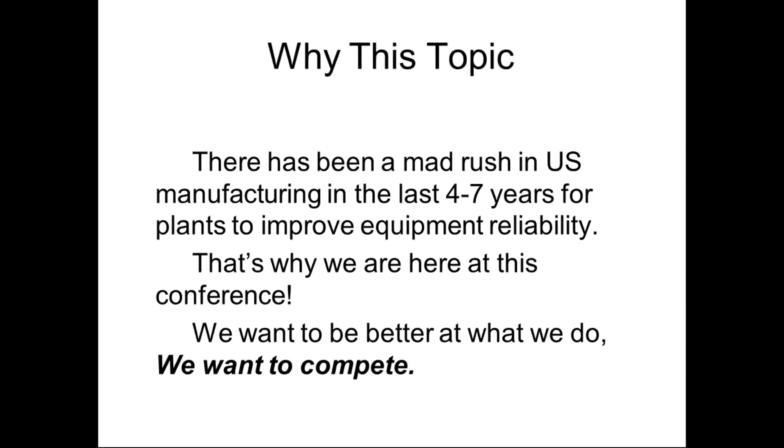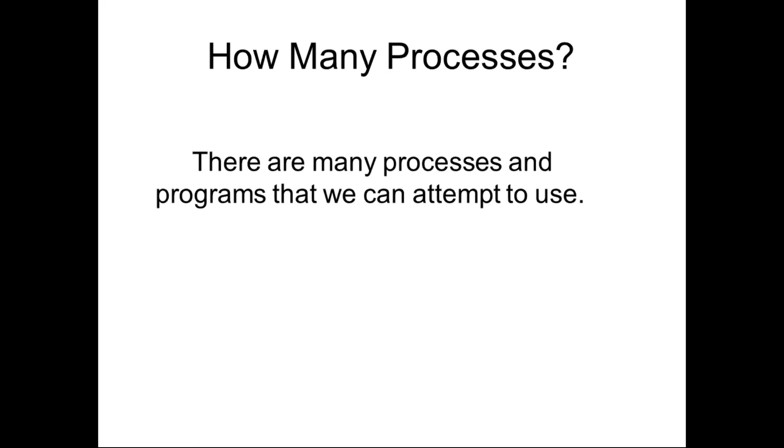What we're really looking for are processes we can implement in our facilities that actually show results in the end, either in more output rate or in lower cost.

This is a question I'm asked by corporate people all the time: is there one process that can take us to these higher levels of equipment life and equipment reliability? Is there a silver bullet out there? Well, there's really not, because every industry is different. Every one of these processes takes you to different levels and does different things for you. So there's no silver bullet that takes us to the end.

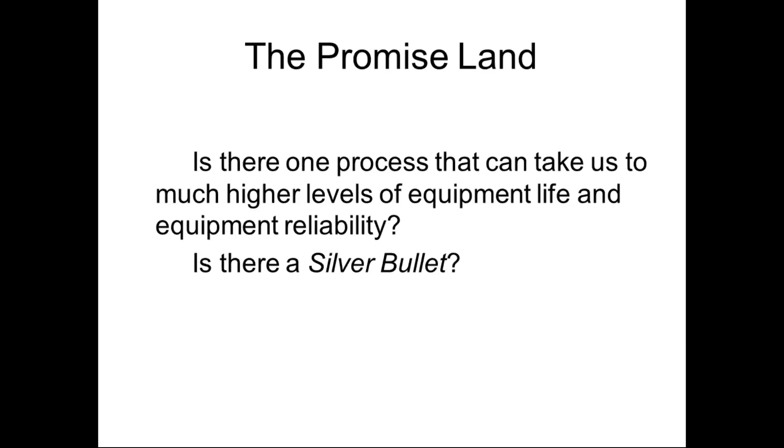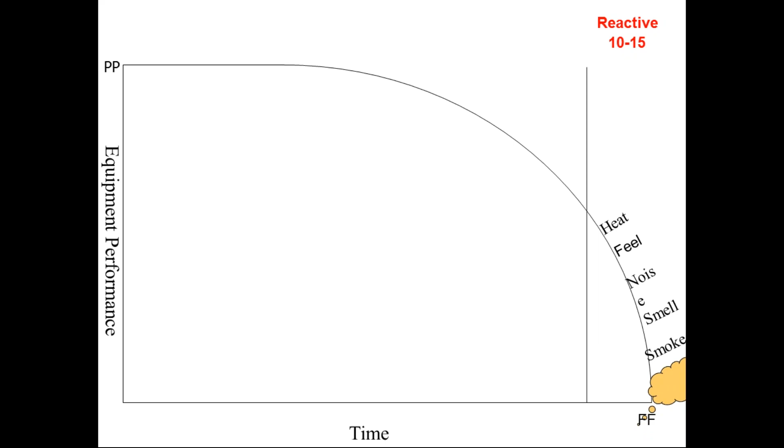If we start using predictive technology where we can predict failures up here, when they first occur in the equipment, before human senses can tell—examples of those are mechanical ultrasound, vibration analysis, oil analysis, wear particle testing, thermography, motor circuit evaluation, and non-destructive testing.

If we use these technologies effectively and actually react to the data, we can make our equipment last a lot longer and have fewer failures.

Now, I've got these listed in an order, but they're not in any order of importance. For example, if I'm looking for particles in my oil, mechanical ultrasound's not going to help me there, but oil analysis will.

If I want to know if my coupling's out of alignment, I might use vibration analysis, and later down the line when components start wearing, maybe oil analysis kicks in. But we have to use the right technology for the failure mode you're looking for.

What this is saying is, if we use predictive technologies effectively, react to the data, and plan the work and make corrections up here in this part of the curve, it keeps the component from getting to this wear mode in the lower part of the curve.

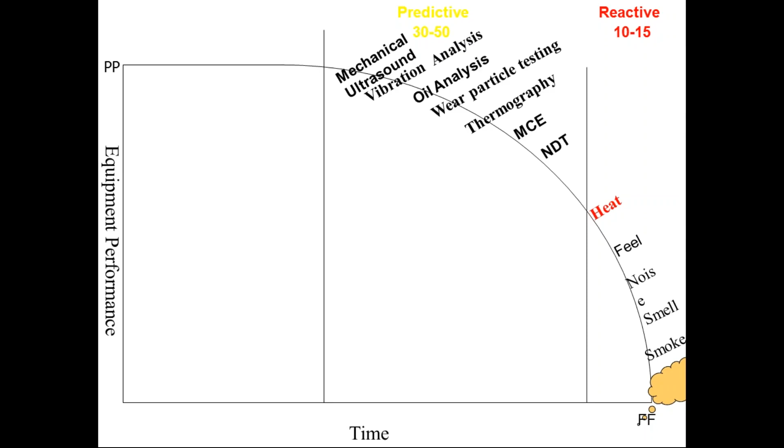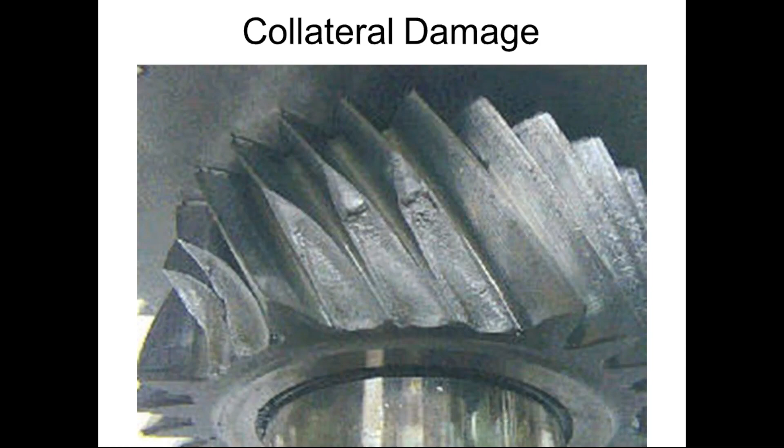An example of that is in a study we did on electric motors. Toshiba makes a better motor because they have higher balance standards. They mill the feet off to within a thousandth, so they use better insulation. More expensive motor for sure, but the company I came from, we used these on our top 20% of our critical equipment to eliminate failures on those high dollar cost items.

But you can see as you go down the line here, there's a lot of processes, and if we do these processes correctly, we become more proactive in our approach to maintenance and reliability, and our cost will eventually go down, and you'll have less reactive maintenance. I always tell everybody, you don't have to be 100% effective or proficient in these tasks, but you have to understand them and use parts and pieces of every one of them.

I've got PM tasks across here. We're performing PM tasks no matter what area of the curve we're in, but these PM tasks are going to get better, and they're going to change as we get better in our proactive maintenance area or better in our reliability process. Again, moving resources where we do more vibration analysis, more predictive and more proactive, moves us from that reactive area.

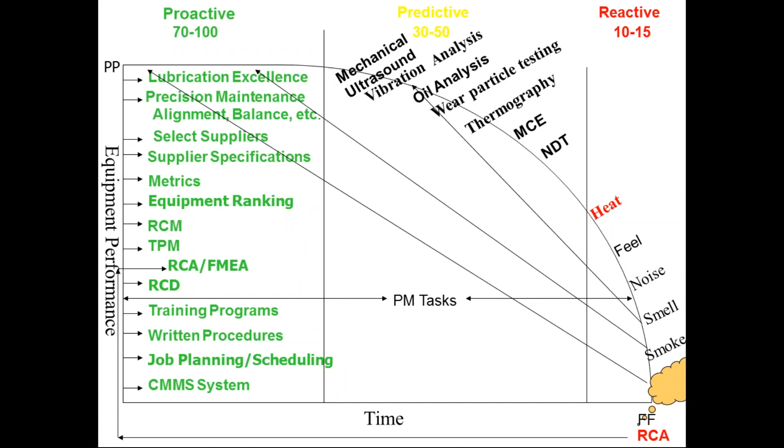As I travel from plant to plant doing training courses around the country, around the world, more and more companies are adopting these predictive and proactive practices and techniques. Why are they adopting these? Well, we talked about this earlier, to be more competitive in their respective businesses. If we do these things correctly, our costs go down, our production many times goes up, and we're more competitive.

Let's talk about some efforts people make in a couple of these areas here. We'll cover a few of them today: foundation and grouting practices, a very common construction practice during installation. If done correctly, it adds some reliability to our processes and our equipment.

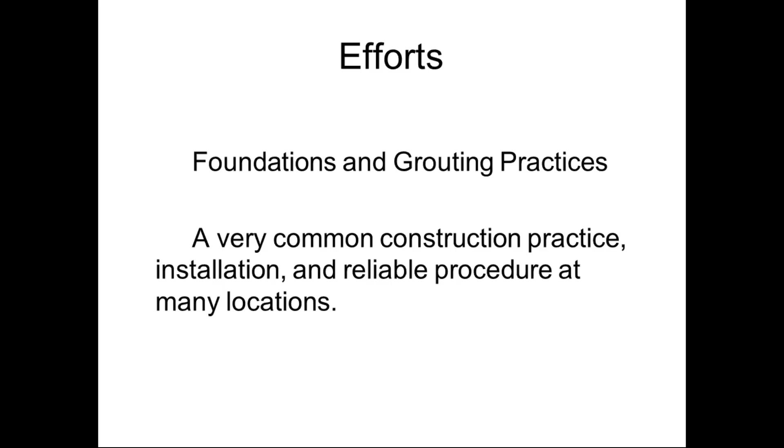Here's a structure that a company's putting in to mount some equipment on. We're doing the grouting process ahead of time, making sure the frame's level, supporting the frame 100% to the floor. And when we put our equipment on here, it should have less vibration, a lot more level surface to mount the equipment to, and it should gain us some reliability benefits.

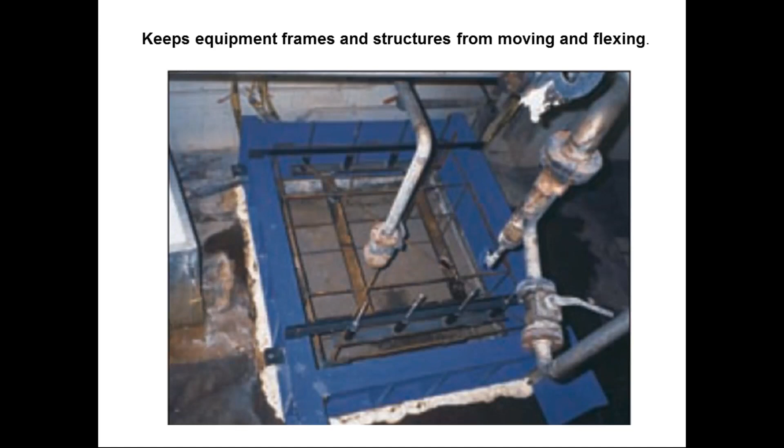Here's a nice application of a plant where the pump foundations are poured on a concrete base. Everything's grouted in place, and these pumps are a lot more efficient and will last a lot longer due to this reliability technique. But there's something we need to look at: after you pour the foundation, you have to use these grouting techniques, making sure we use a good base to mount the pump on.

If you look at the base in the upper left-hand corner, the standard base you see in many industries, it's a rounded piece of channel. The surfaces aren't completely flat, so we have to do a lot more shimming, a lot more chance to be out of alignment. The other two bases show bases that have machined surfaces to mount the motor on, machined surfaces for the component, whatever it might be, and we can do a lot better job of alignment, and the component is supported much, much better.

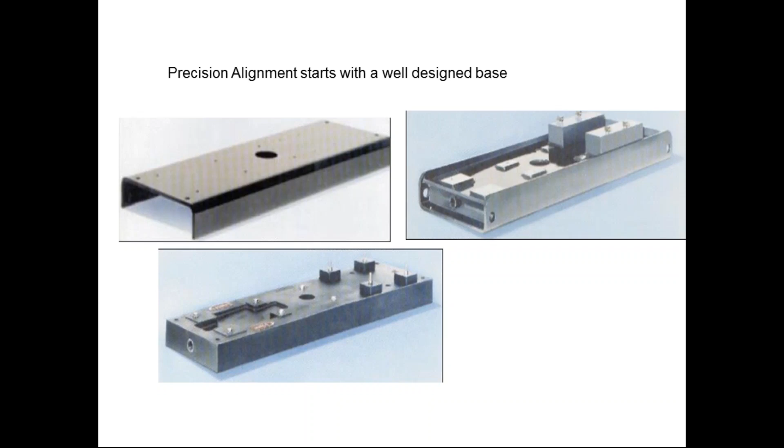Here shows the base with the machine surfaces, but it's also got alignment bolts on it, so we can move the motor around within a thousandth or two very easily without beating it with a hammer or prying it with a crowbar, and this gives us a lot more accurate alignment process.

One of the things in mounting equipment, it says the foundation mass should be approximately 5 times the mass of the supported machinery. So if you can imagine these 30-degree lines from the center of rotation, this is one of those engineering practices we look at, making sure we get the component on a base that's actually going to support it, so we have enough foundation to keep the component from ever moving.

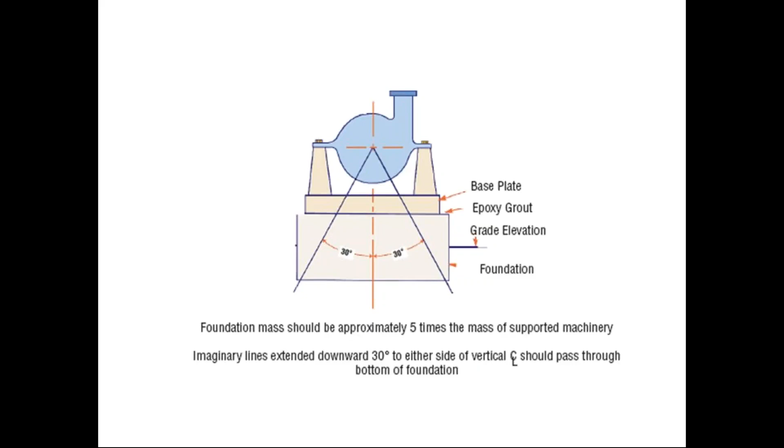This comes from a refinery I was working at. This was a construction practice for all their pumps. They actually put a concrete foundation 3 feet down in the ground, put the base on there, leveled the base, and then filled the hole underneath the pump base and out to the edges with an epoxy grout, so they had a nice, perfectly level surface to mount their pumps and motors. A good construction practice.

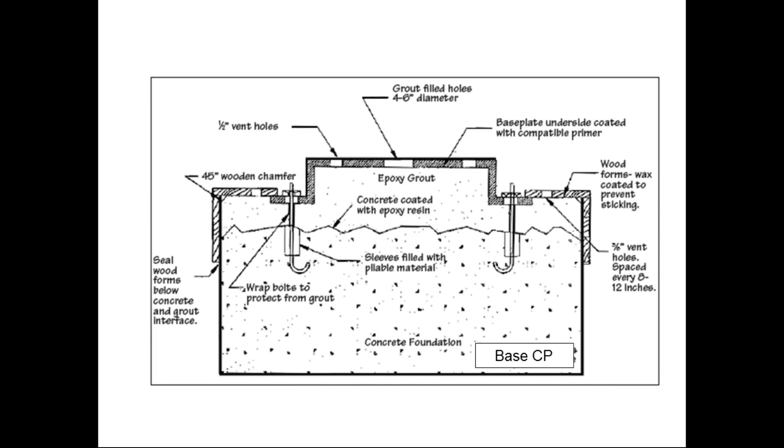Here we have a foundation base for a pump and a motor where there's no support in the middle, which allows the base to vibrate a little while the component's operating. This happens especially when you don't have a balanced rotor in the motor and a balanced impeller in the pump, and maybe some misalignment, causing vibration which will cause the center of this base to move around a few thousandths and cause issues with wear.

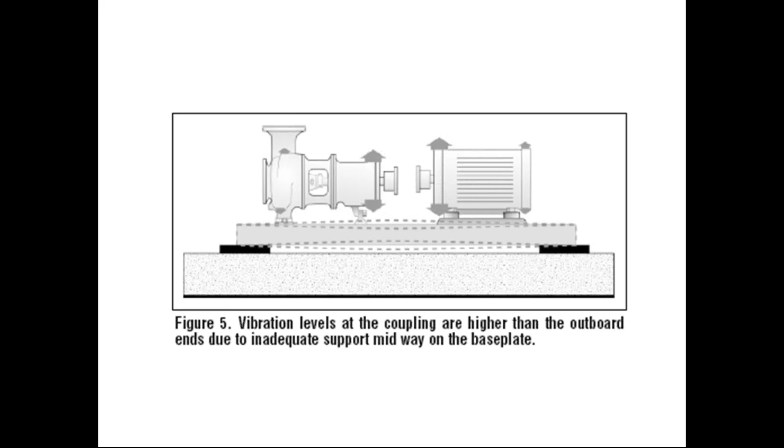So, grouting practices to eliminate vibration and alignment issues. Yeah, you can say we're doing it for that reason, but it does work if performed correctly. Is the grouting process really a reliable process? I think it is if we follow some other rules.

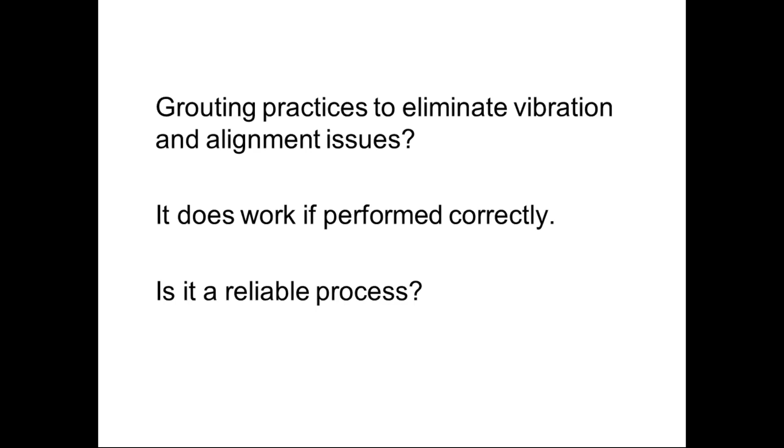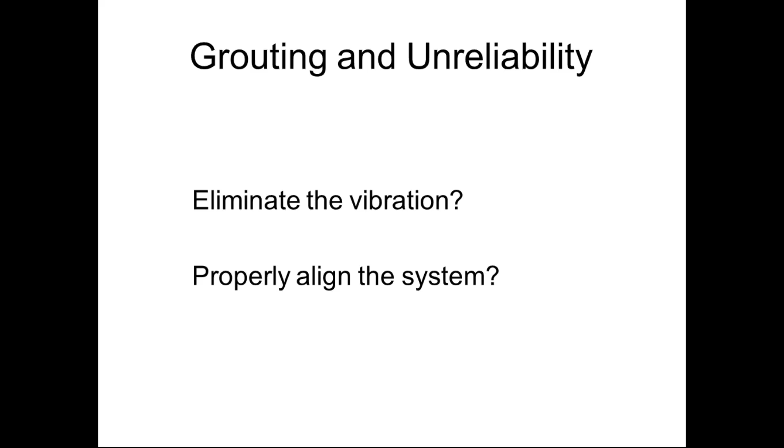So if we're grouting, does that actually eliminate vibration? Does proper alignment eliminate the steps needed just by doing the grouting process? My question is, what happens if you have an unbalanced motor and an unbalanced pump, with an impeller that's not been precision balanced? If we buy a standard motor today, or a standard Goulds or Flowserve pump, I always ask: are those two components precision balanced? The answer is no.

The pump is balanced to an ANSI standard of 0.08 to 0.12 inches per second. That's not a precision standard. The rotor in the motor is balanced to an ESA standard of 0.08 to 0.12 inches per second. I've checked a lot of those in the past, taking brand new motors out of the box and running a vibration check. I once found a 150 horsepower Reliance motor with vibration at 0.28, brand new out of the crate. I found other motors at 0.18, so they're way outside the specification.

The reason we don't know this a lot of times is because most of us don't check new equipment. We assume it's new, so it's got to be good and meets the standards. Well, some new specifications apply when rebuilding, or if you buy a Toshiba motor, the balance standard should be 0.05 inches per second or less. If you buy a brand new Goulds pump or Flowserve pump, you can actually give the manufacturer that specification to balance the impeller to before you put it in.

Now back to this question. Let's say we put our unbalanced pump and unbalanced motor on this perfectly rigid, rock solid grouted concrete base. My question is, where do the vibration, imbalance, and misalignment forces go if we have this on such a rigid base? Do they just disappear? They really don't. Those forces have to still go somewhere. They're still there due to imbalance and misalignment.

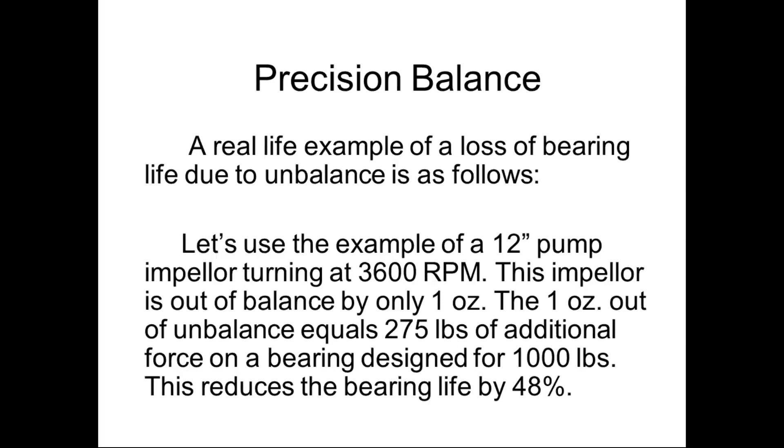And now if we add misalignment to that equation, now we reduce bearing life even more. I won't spend much time on this slide. I put this slide in there so you guys can substitute your own numbers, your own speeds, your own sizes. You'll always have to call your vendor to find out what the bearings were originally designed for, but you can actually do this calculation on your own.

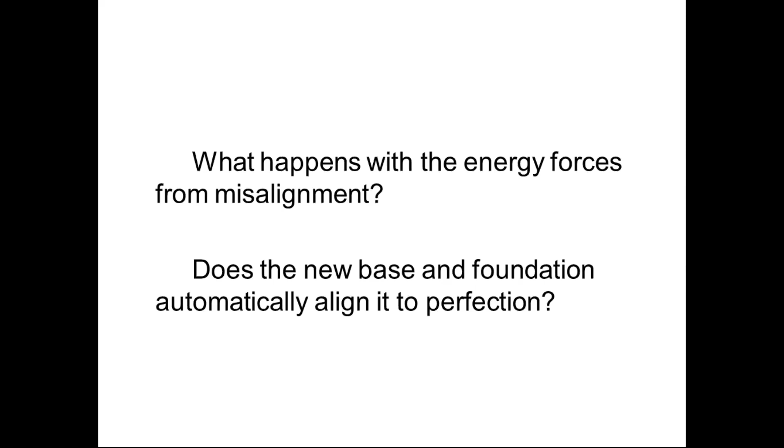So again, what happens to the forces of misalignment? They have to go into the bearings. So does a new foundation, a new base, automatically align it to perfection? No, they help the situation, but there's some other things that go into reliability around that. The energy forces still exist in the same magnitude. We're just applying the forces more directly to our rotating components than we did before. So you're still going to have a high fail rate.

So it's a better process to adapt. Purchase precision balanced motors. If you're rebuilding motors, make sure you give the motor rebuild shop a balance spec when they rebuild that rotor of 0.05 inches per second or less. When you're purchasing brand new pumps, or having pumps rebuilt, balance the rotor in the pump to less than 0.05 inches per second. And this is going to add years and years to the life of your pump.

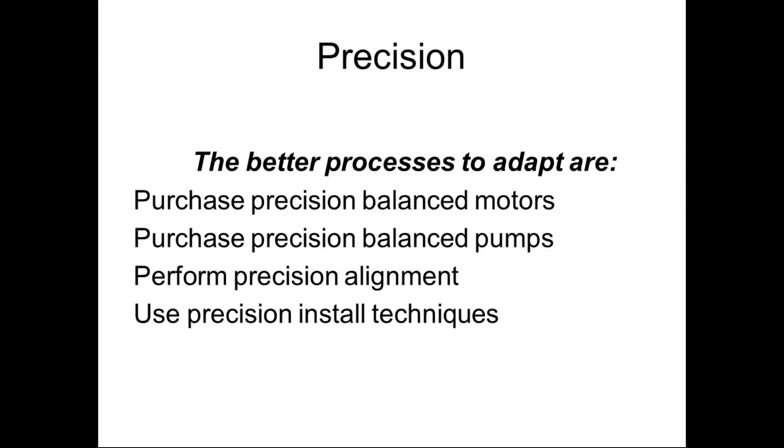Make sure you're actually performing precision alignment. I'll show you some slides where a company spent a lot of effort. They bought the best tools you could buy for precision alignment, but they didn't follow the alignment practices and world-class techniques. Always use precision during your installations.

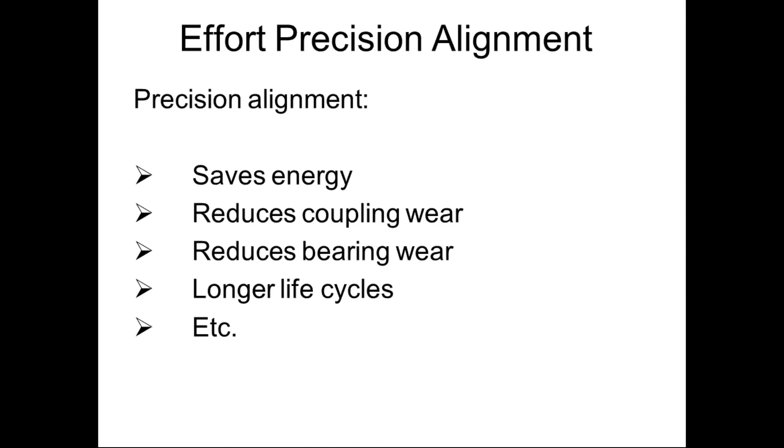So what's precision alignment do? It reduces energy, reduces coupling wear, reduces bearing wear, longer life cycles on your equipment, and the list goes on. So it's a practice we have to do.

But in just going around the last 3 years, I've only been at a couple plants where they're actually doing precision alignment correctly. They were doing what they call precision alignment, but not following the practices was not giving them actual precision alignment.

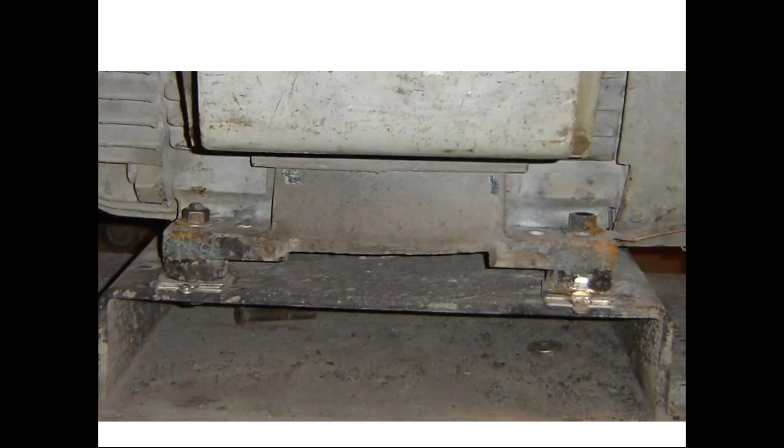I'm hoping this slide comes out. This was from a power plant outside of Cincinnati. This is a 150 horse motor. I watched some maintenance guys, 3 of them, they were at this motor for about 6 hours with one of the best laser alignment tools you can buy.

At the end of the process, I was there working on some other projects, but I walked over and asked the question, how'd the alignment step go? And he said it went perfect, I've got smiley faces in all 3 planes. So I said, what's the smiley face actually calibrated to?

Well, 3,000ths. So I said, oh, that's good. And I said, what do you do with the data? I'm going to take this data and download it into my CMMS system. You know, good practice. So when they left, I took a picture of this motor.

So here you can see on the right-hand side, the bolt doesn't even come through the nut, which is an issue. They didn't have a torque wrench at the job site, so they didn't use a torque wrench to tighten anything. If you look at the left bolt and nut, the washer's actually squeezed down into the hole of the motor. The base was never cleaned off, and they reused the shims.

And again, one of the standard or best practices for a motor base is it should be within 75% of the thickness of the motor foot. You can see here how thick the motor foot is, and you can see how thick this 1/2-inch channel iron base is. You can even see that the base is bowed. So lots of practices here that are not going to gain him any precision.

And then I asked the question, how did you move the motor around to get it within 3,000ths? Well, if you look at the 2 little marks here, I hope you can see my arrow, but there's 2 marks on the side of the motor, and they used a brass punch and an 8-pound sledgehammer to move this motor around during the alignment process.

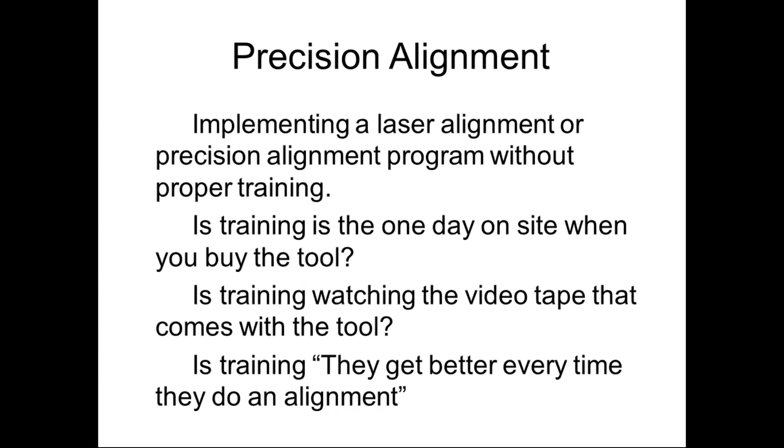If you look at an electric motor, I always ask the question when we're talking about precision alignment: what do the bearings in an electric motor actually do? There's a number of answers, like they support the rotor, they keep the rotor from touching the stator. Some of those answers are true, but the real truth is the bearings keep the rotor from touching the stator when the motor's not running. When the motor is running, if you have proper alignment, the rotor will stay in the center of the stator due to the magnetic field.

Now, I proved this to my maintenance people at the plant I came from. I took a 10 horsepower electric motor that had a balanced rotor in it. I took the end bells off of that electric motor, had it bolted to the shop bench. I actually took lay stands to put the center of the rotor in the center of the stator, with the lay stands holding the motor. Then I had the electricians wire the motor up and turn it on. And then I took the lay stands away. What happened was the rotor just stays in there and runs in the stator in that magnetic field. You don't need bearings to keep the rotor in the center of the stator.

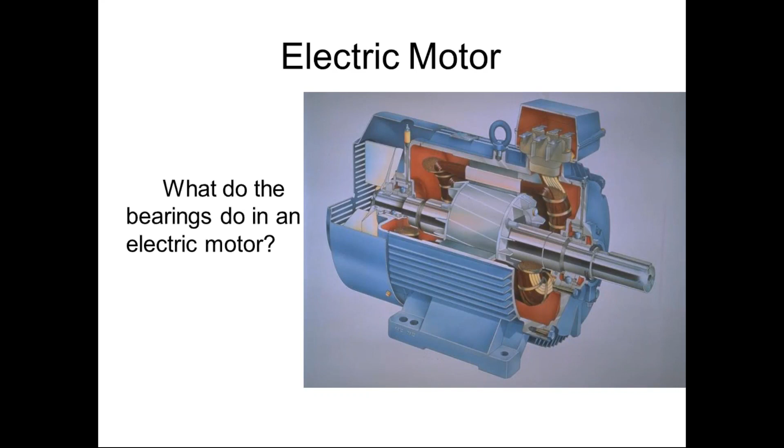So at the end, I caught the shaft and stopped the motor, but what I was trying to explain to my guys is if we do precision alignment, the bearings in electric motors should never wear out because there's no load on them. Now, making sure you follow all the steps of precision alignment, using thermal growth and things like that, are all techniques we have to follow. But again, there should never be bearing wear on a motor that's precision aligned and precision balanced. So the motor bearing should do nothing when the motor's running if it's a direct coupled application. Now, if you're going to hang a sheave or a sprocket on the end where it's actually pulling on the motor shaft, we're going to have some bearing wear there, and we need to make sure we have the right bearings in place.

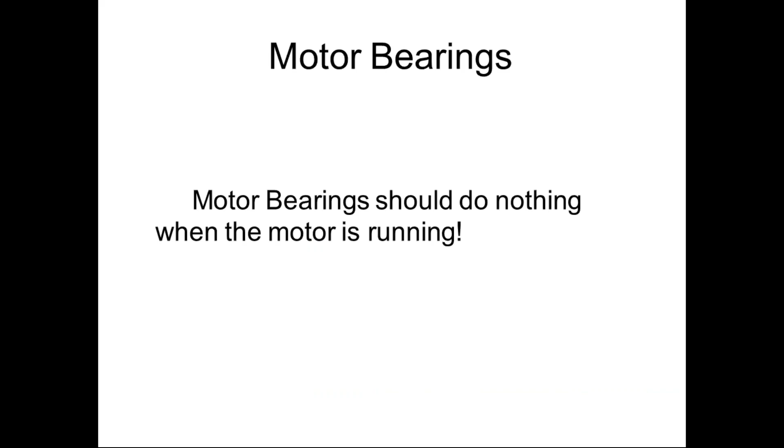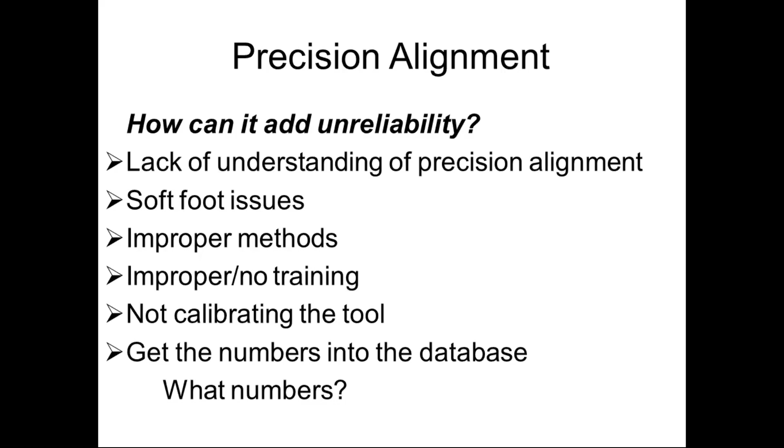So with precision alignment, you know, there's lack of understanding precision alignment, not correcting soft foot issues, improper methods, no training, not calibrating the tool. I was at a plant where they hadn't calibrated their laser alignment tool for 3 or 4 years, and we sent it in, the tool was out of alignment by 0.008. So again, they're doing precision alignment with an uncalibrated laser alignment tool, leading to unreliability. So getting the number to the database is an important step, but what are the numbers? Are they actually real and accurate?

Some other silver bullet processes: people that start the TPM process. Just saying you're going to do TPM, and actually trying to get TPM done, is a big step. So making sure you understand what TPM is, and the key thing there is making sure that everyone in the plant, down to the operator, knows what TPM is and knows what the effort's going to be. Now, I can't mention the company name, but they started their reliability program about 6 years ago. They went from 52% OEE. They're at over 92% OEE now, and they're trying to get to 96. Well, it may take them another 5 years to get from 92 to 96, but the effort we're making there - it was a union facility.

We couldn't ask operators to do maintenance, but we did some operator care training where we trained the operators on every single component on their lines. Every bearing, every motor, every chain, every belt, all that equipment, how those can fail.

This part of the program was not maintenance, it was called operator care. Operators did inspections and were able to communicate with maintenance more effectively. Maintenance knew about things happening in the equipment much earlier. We bought the operators some tools to do checks, like strobe lights and temperature guns.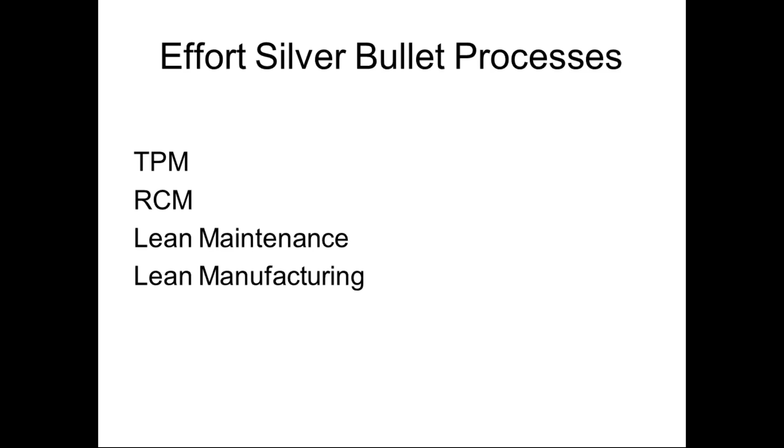That was an operator care program very similar to TPM. RCM, the biggest failure with RCM was: I do the RCM analysis, but very seldom do they implement the things you find. That makes it one of those processes that could be good if you follow all the steps. Again, lean maintenance and lean manufacturing processes are very good, but you have to be reliable before you can be lean.

Understanding what you're trying to accomplish and what has to be in place to start a new process is key when building these reliability programs. So TPM is not just the process of giving an operator a maintenance task and expecting the equipment to run better, last longer, and be more reliable. It takes written procedures, training programs, and following the proper steps of TPM. These processes are key to making that successful.

Now, how do I know from other industries that written procedures and training programs work? One of the things I look at is the U.S. military. I ask people, how old is the maintenance technician that maintains a B-1 bomber, an Apache helicopter, a nuclear submarine? A lot of times those are 19, 20, 22-year-old kids.

How do they maintain those high-dollar components without having failures? The answer is they're well-trained. They have written checkoff lists where they do everything by the list so we don't make mistakes, and there are very, very few failures in those industries. So again, training and written procedures are key to making a TPM process work.

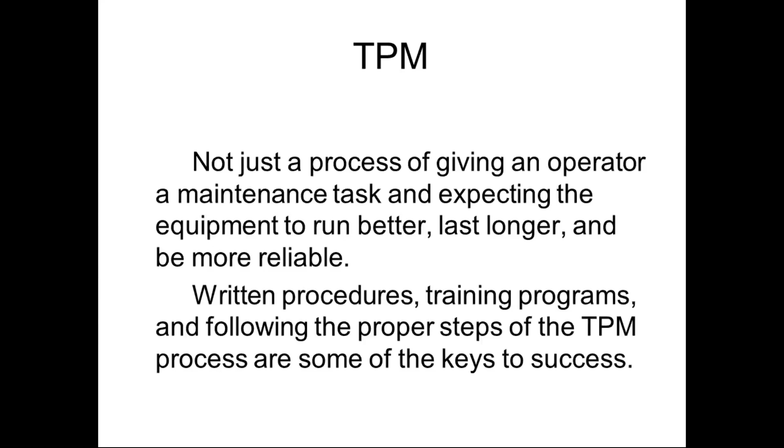You must have good maintenance procedures in place to make your processes work. I've been in a number of companies that haven't done training for 3 or 4 years with maintenance or operations, and they don't have good written procedures in place.

But I hear this at many facilities: Bob's fixed the equipment 100 times, he's our expert on fixing the equipment. Well, if you've fixed it 100 times in 20 years, maybe he's not the expert. Sometimes we assume they are, but some good training and good procedures in place may make the equipment last a little bit longer.

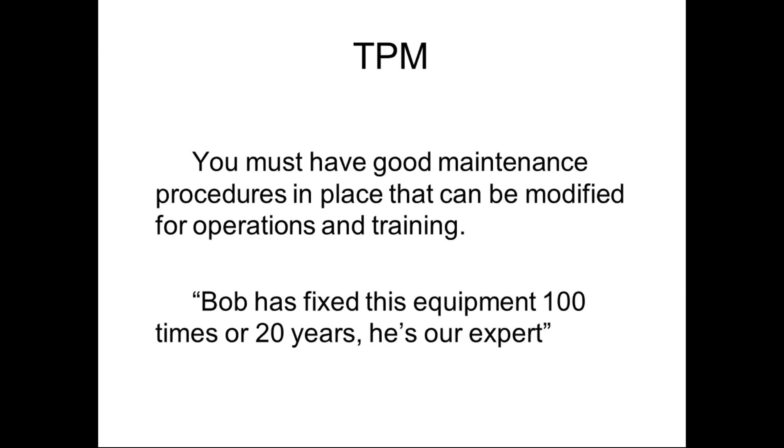If you're doing lean maintenance - I went into companies where they've done lean maintenance and haven't gotten maintenance involved in it. That's an unreliable step. I was at a company where they put in all this food processing equipment using lean maintenance and lean manufacturing techniques, but there wasn't any way for the maintenance guys to do their PMs.

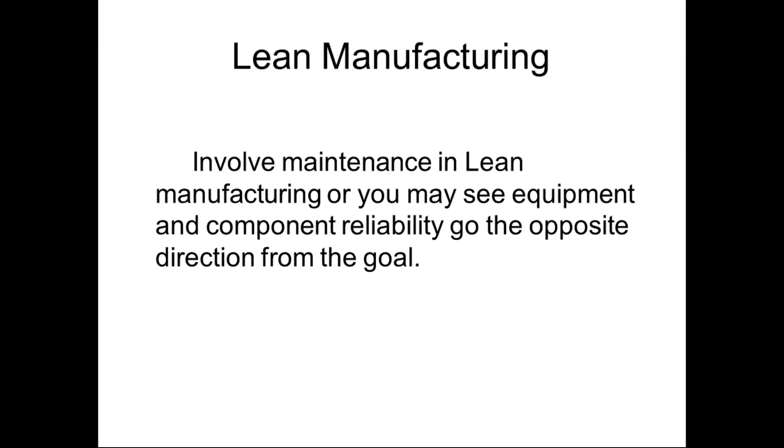We had to actually unbolt a machine and drag it out on the floor to be able to get in and do some maintenance. Not very effective, but again, if we had involved maintenance, we might have found those issues a lot earlier.

And I always tell people, and I'll repeat it again, you can't be lean until you're reliable, so you have to have processes in place to get lean.

Reliability Centered Maintenance is a process developed to determine failure modes of equipment components. If we know specific failure modes, we can develop methods to predict, prevent, or eliminate those failure modes. The process involves knowledgeable teams that know how the equipment components in the plant fail.

Some good documented failure information from your CMMS system - very few plants I go into have good documented failure information. Making sure you have OEM information available - there's a lot of plants I go to where there are no old manuals on the equipment, no OEM manuals around. It's hard to know how equipment actually works and how it fails. So again, understanding how things fail.

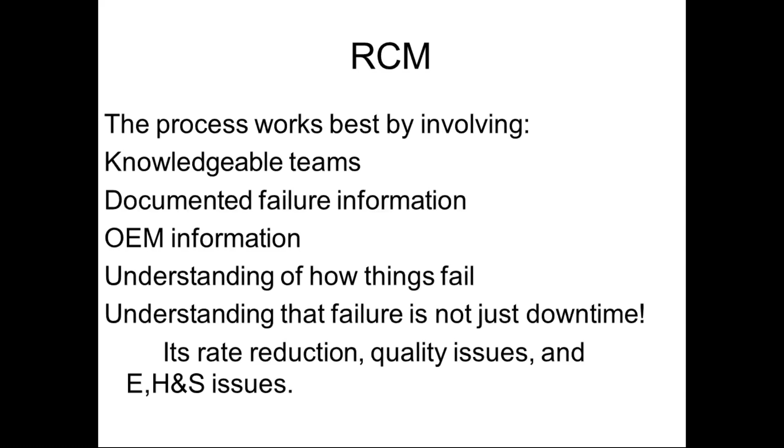One of the classes I do at many companies, I just did it this week for a company, is equipment failure modes training. We go over motors and bearings and what are all the failure modes, which ones are related to your plant, and how we recognize them. Then we go into how we prevent them with preventive maintenance tasks, how we can predict them with predictive maintenance tasks, and sometimes how you eliminate them by redesigning or doing things differently.

What's the biggest failure in RCM? When I do RCM analysis, you spend all the time and effort, and we never implement the RCM. Talking to Doug Plucknette, over 50% of the people we do RCMs with, the RCM is never fully implemented, so you don't see the success from it.

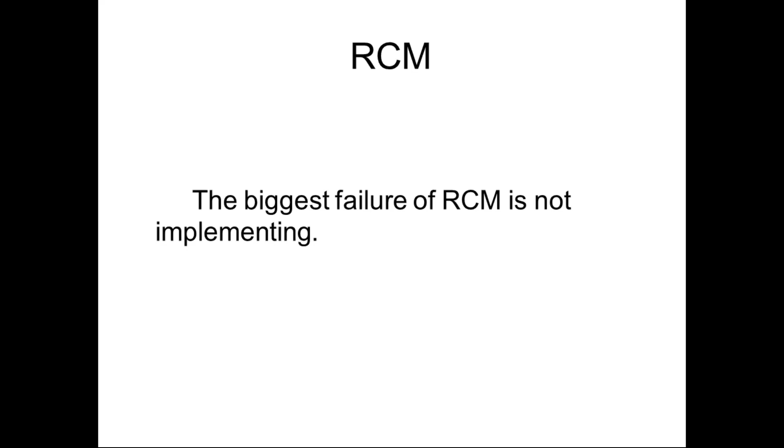I threw a few slides in here toward the end. This is a study that was done at the plant I came from. Where are all the failures in equipment? Well, 25 to 35% of all equipment failures are originally engineering and design failures, like poor equipment selection.

Improper sizing of components. An example was sizing belt drives on fans. Sometimes if you ask a fan company or Motion Industries to do that, the calculation may come out to 4.3 or 4.4 belts. Why did they give you 4 instead of 5? That's an unreliable design, along with poor foundation base structures and not understanding factory alignment and balance.

I put some equipment in for a company, and I said, do you want me to hire somebody to do the alignment? They told me all the pumps have been aligned at the factory. Well, it doesn't work that way. When you ship them, move them around, and bolt them down, they're not in alignment anymore.

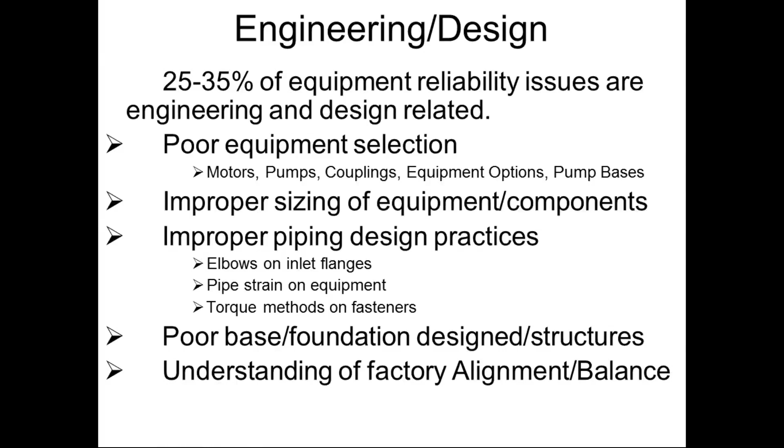This year we spent a lot of money at the company I came from finding out who makes the best motor, the best pump, the best of all these things we use in our plants. Once you know who makes the best, do we put that on all of our equipment? No, we put it on our high dollar equipment, or maybe our top 10 or 20%, to reduce failures and reduce large downtimes.

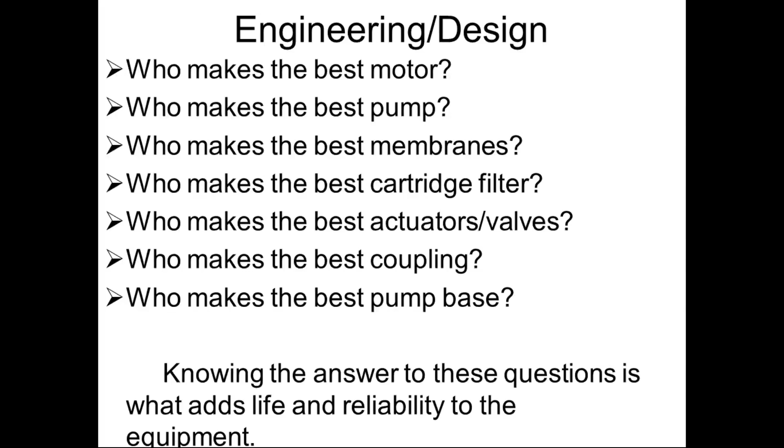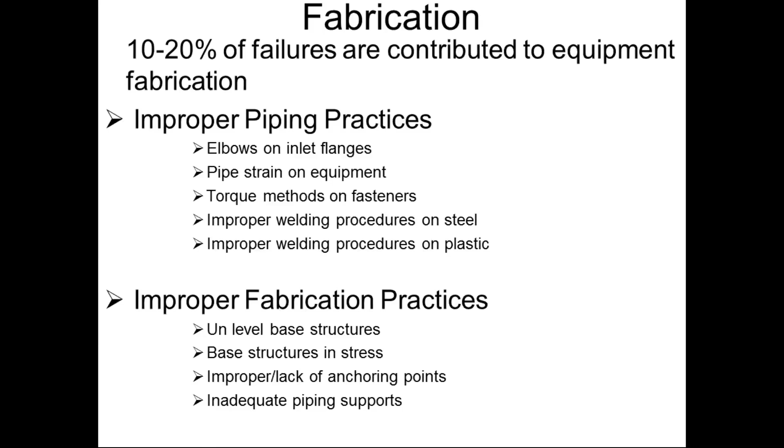Look at this, 10 to 20% of our failures are just in fabricating the equipment. A lot of times we have companies build structures and equipment for us, and here are some of the reasons equipment fails early due to fabrication, like picking points, tie downs, and the way we move things around our facilities when it gets there. Lots of fabrication type failures.

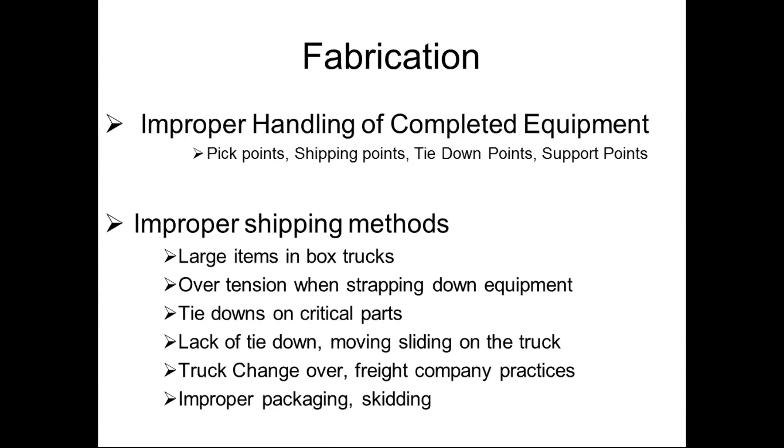Here's a company that built these big pump skids, probably 18 feet long with 3 pumps on them, bolted only at each corner. When I started those systems up, there was lots of vibration and resonance between the pumps. We had to add clips to bolt them down to the floor and fill all those areas up with grout. There was just way too much resonance and movement in the frame.

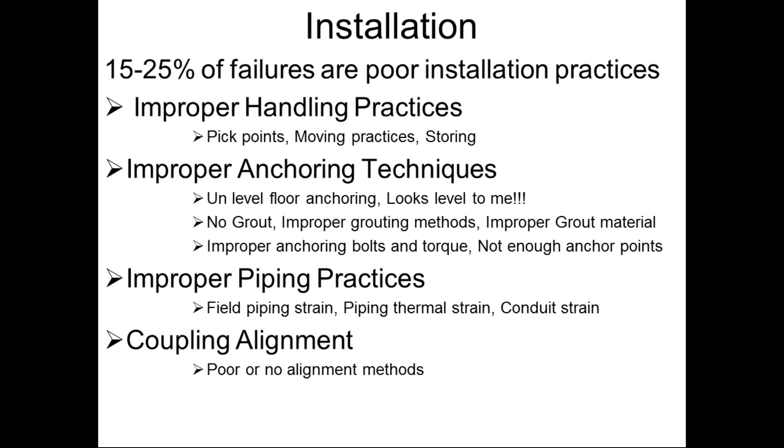Installation. Sometimes we say, well, we know our contractors are good at installing things. We hire the people to put things in, but 15 to 25% of your failures are in installation practices—grouting, improper grouting techniques, improper anchoring techniques, piping strain, thermal strain, conduit strain, coupling alignment. It's all installation things, including improper lubricant on the first application.

I always tell people, if you're doing lubrication excellence, the very first lubricant you add to new equipment should be the cleanest it possibly can be—filtered down to 3 microns, no particles, no moisture. That's where you get the biggest bang for your buck with lubrication excellence. Here you've got no precision alignment or balance standards when installing equipment, so again, lots of failures there.

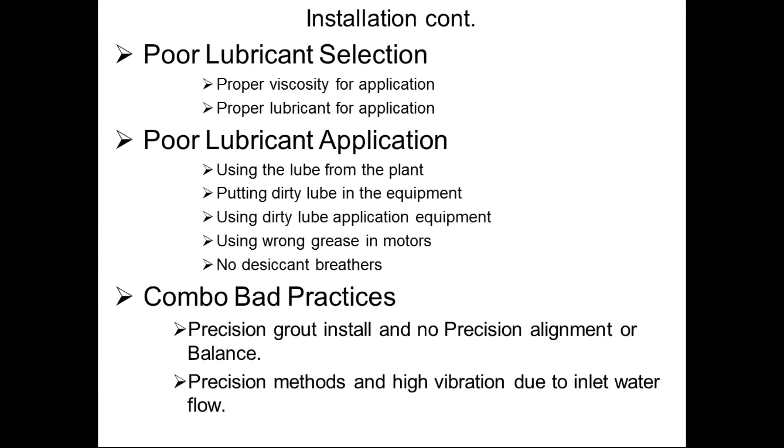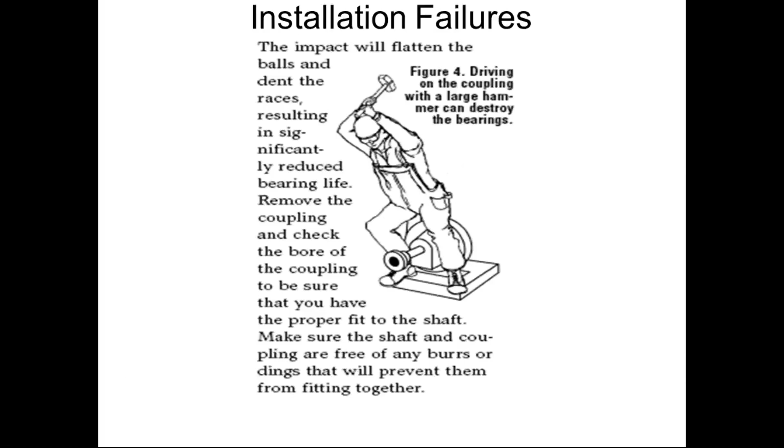Your outside contractors and maintenance people—do we have bad practices like beating couplings on a shaft that are actually destroying the bearings inside? All installation failures. Now we get into operations. It says 10 to 20% of our failures are from operational issues.

Starting equipment under full load, closing discharge valves too fast, your operations people not putting their hands on things, checking thermal conditions, vibration conditions, not checking oil levels, operating equipment in manual, lack of fluid to the pump on startup, putting water on components.

An operator one time was going through a plant, and the motor thermals was kicking out on a motor that night. His solution was to duct tape a water hose on an electric motor. Well, there's something wrong besides just the thermals kicking out to cause them to kick out, and running water on an electric motor is not a good plan. That's a lack of a TPM program so operators know what to do.

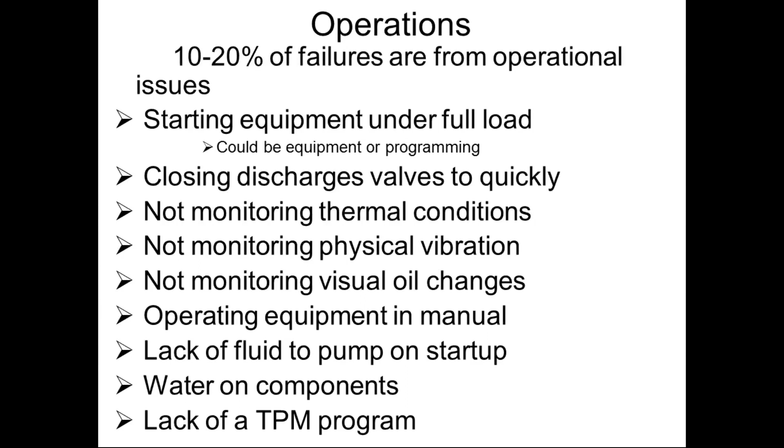And then it gets down to the final one here. 20 to 30% of our failures of equipment are maintenance related. You know, improper inspection, improper lubrication practices, no or poor preventive maintenance program.

If you look back at your preventive maintenance plan, how many of your maintenance tasks say check the pump? What does that mean? Check the conveyor. We have to tell them what they're supposed to be checking, why they're checking, and what they're supposed to do if it's out of alignment.

I had this conversation this week with a group I was training. When you do a preventive maintenance task, what I always told my people is I want you to find something. If you're not finding anything, maybe the task is not even applicable. So no proper predictive maintenance program, no proper proactive maintenance program, improper training, no procedures, no training programs, no follow-up, no retraining. All parts of making maintenance unreliable.

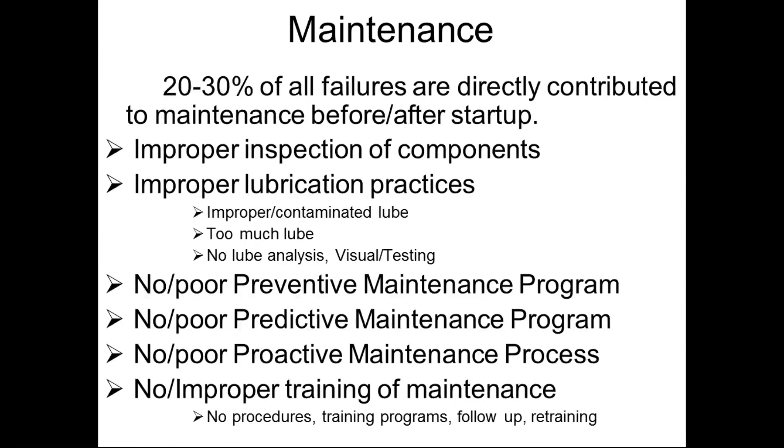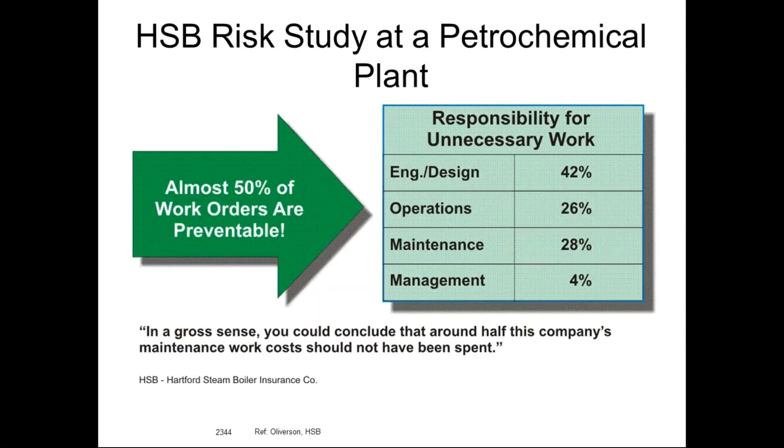What about the effort of getting PDM started at your plant? We start PDM programs. We start buying PDM tools, predictive tools. We start hiring contractors.

Well, some issues with PDMs is not reacting to the data. And I got a slide mixed up in here somehow, but we don't react to the data. So your PDM technologies aren't effective, and they don't have a payback because we don't react to what the data is telling us.

And then an analysis program around the plant to properly sample the equipment so you know when the lube needs to be changed, when it may need to have something done to it like filtering particles or filtering moisture. Because many times you'll find out from your oil analysis program that there's really nothing wrong with the lube, but it's all the things in the lube that we could take out.

The lubricant may still be good, but sometimes we throw it away or change it just because the lab analysis comes back and we don't really know what to do about it.

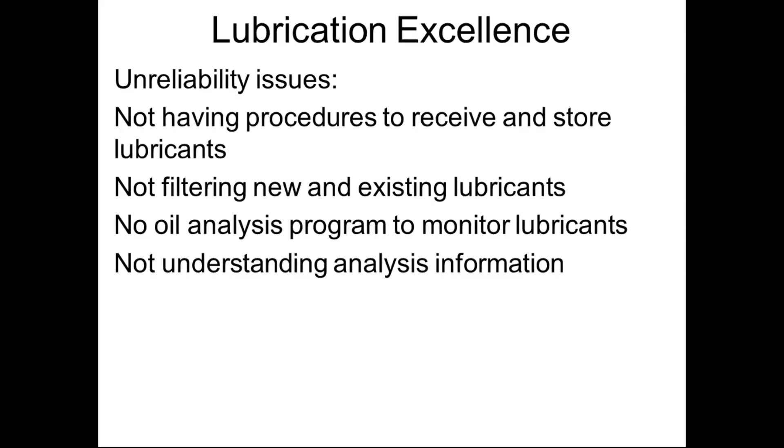So we have to understand what the ISO codes mean. We have to understand some cutoffs for moisture, for oxidation, for viscosity, which are all things that could change in our process. So we have to understand how to analyze that information.